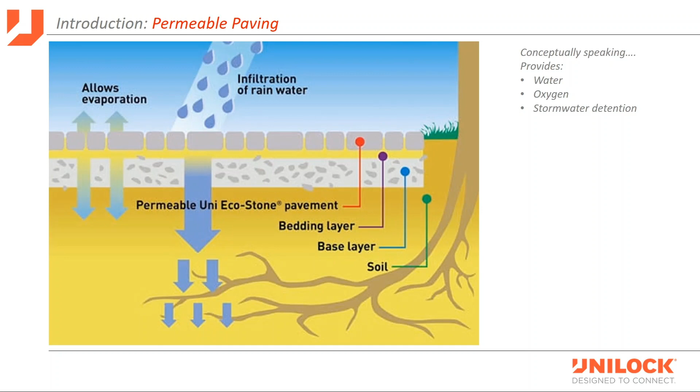However, people often forget that concrete pavers were designed for heavy-duty use. All over the world they're using these heavy-duty applications where forklifts and semis drive across concrete pavers. In the U.S., the Port of New Orleans, the Port of Tampa Bay, and the Port of New Jersey all have pavers in their container yards. The Port of Oakland is actually the largest paver yard in the U.S., at about 2 million square feet.

So when you combine the aesthetics of concrete pavers with heavy-duty capabilities, you create a new function with permeable pavement, by allowing water to flow through the openings in the joint and get back down into the subgrade soils.

These are pictures of Couch Place, one of the green alleys in Chicago, that links the theater district from the Goodman Theater to the Chicago Theater. This allows pedestrians to walk through this corridor safely without dodging puddles, as water flows through those openings, but also allows semis to pull in, unload and reload, as well as garbage pickup. So it makes it a multi-purpose alley.

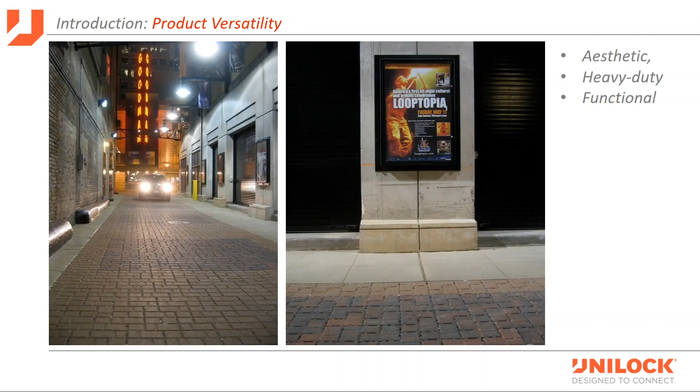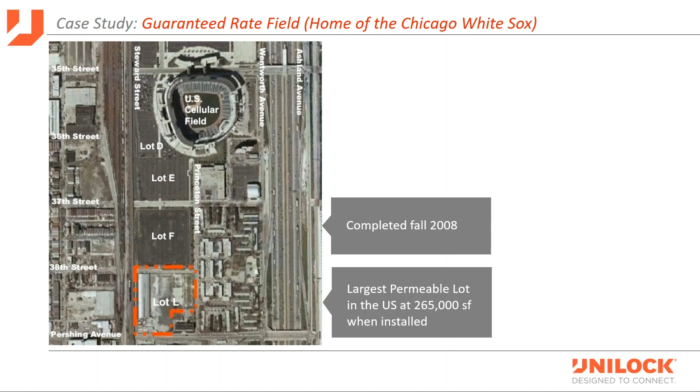So they looked at doing a traditional parking lot design, which included 44 inlets and catch basins, over 3,000 linear feet of reinforced concrete pipe. They also had to include a 73,000 cubic foot underground storage tank. And all this would have cost about $2 million in underground infrastructure that was going to be completely buried.

You never see that. So they went back to the drawing board to take a look at a green infrastructure project using permeable pavement. The first thing they checked out were what the site soils were going to look like. They discovered that because this used to be an old lake shore, they had a very high infiltration rate, up to 14 inches per hour, into the sandy subgrade soils.

That meant they could eliminate all the inlets. There's no reinforced concrete pipe or under drain, and they could eliminate the underground storage tank because they could use the granular base material underneath the parking lot as their storage area. So they ended up saving about 15% versus their traditional system.

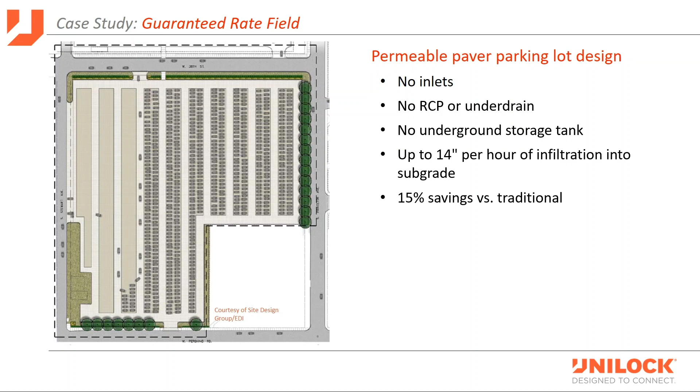The other great thing about this is that it does not connect to the City of Chicago stormwater system. The City of Chicago actually has a combined sanitary and stormwater system, so by dumping all this water into the stormwater system, it would cause problems in different locations.

Now we'll go back through the materials here in a little bit, but I just want to mention the capacity that's out there. This permeable lot was about 265,000 square feet. They had about 14 inches of granular base, and the void space generally is about 40%, which means you can generate about 123,000 cubic feet of storage. They only needed 73,000 cubic feet, so they actually have a surplus of about 50,000 cubic feet of storage on this project.

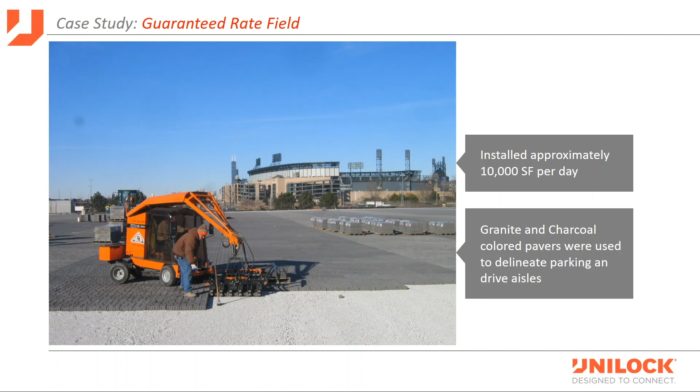Now they had 2 colors out there: a charcoal color and a granite color, and that was really to delineate the drive aisles from the parking aisles, or from the parking spaces. If you go out there on game day, they cram as many cars out here as they possibly can. They used a mechanical installation device, had a couple of them out there, so they're installing at least 10,000 square feet per day using the machine, and we'll talk more about that later as well.

The last case study I'm going to talk about is Buckingham Fountain. What makes this project unique is that it's a historic landmark located in downtown Chicago's Grant Park. The material that was out here was a decomposed granite / pea gravel type material in a pinkish color. This area was not accessible, so the Chicago Park District wanted to rip all this out and make this an accessible area for everyone to use.

When the project was completed in the spring of 2009, it was actually the largest permeable plaza in the U.S. at about 235,000 square feet. The biggest challenge was installing around this fountain area because that area is about 1 acre of space to navigate around. So the contractor started at 3 o'clock, worked clockwise around to about 11 o'clock, stopped, went back to the starting point, and worked counterclockwise so they could zip this up to become one giant monolithic segmental paving surface.

To meet the historic preservation's requirements, they needed to create that same look and feel as the existing pea gravel / decomposed granite material. So they selected the Unilock series exposed granite finish. We take crushed granite, embed it into the surface of the concrete, and then it's washed to create this sparkling surface. If you go back out there today, it actually looks better than the day it was installed because you have more granite that's exposed and sparkling out there.

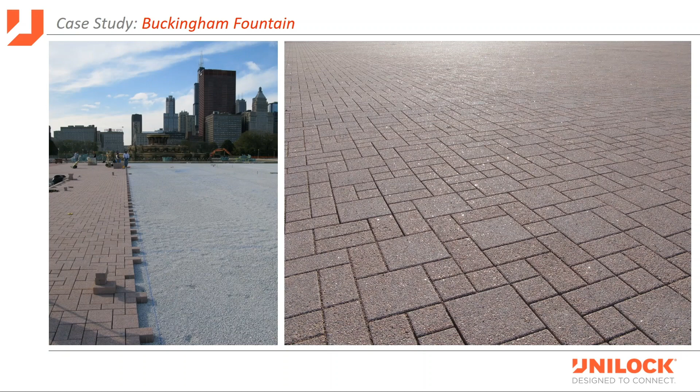And this is the view after completion in the spring of 2009, looking north towards downtown Chicago.

Part 3: Benefits and Systematic Solutions for using Permeable Interlocking Concrete Pavers.

I'll start off with some quick facts about permeable pavement. It is considered a structural BMP by the EPA's National Pollutant Discharge Elimination System, meaning that as the water flows through the granular base material, it's actually going to clean the water and improve the water quality.

Permeable pavement also can reduce runoff and runoff temperature. As I mentioned earlier, the aggregate base is often used for stormwater detention. If you're working with engineers on the project, they always want to know the C value, or runoff coefficient. It's actually 0, meaning all the water that hits the surface runs through the openings in the joint, goes through the granular material, and hopefully gets back down into the subgrade soils.

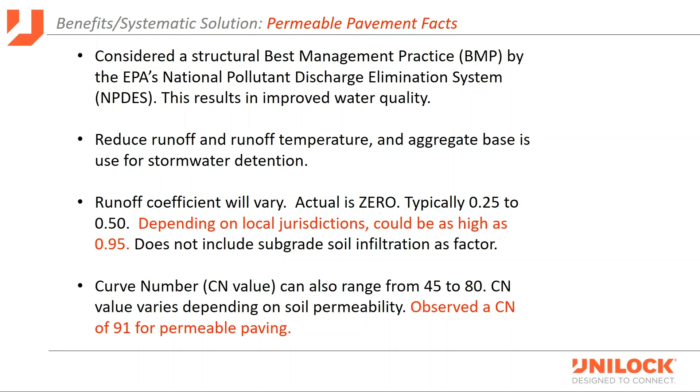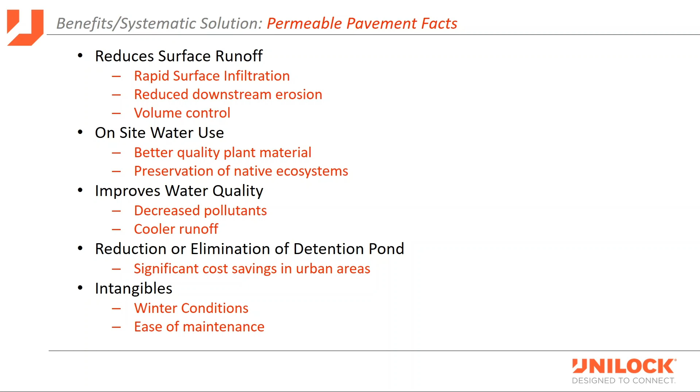Some additional facts, which we'll cover in the next few slides: it does reduce surface runoff, we'll talk about rapid infiltration, volume control, and how it allows you to use this water for on-site use, capturing it for plant material or preservation of native ecosystems such as wetlands. It also improves water quality, and we'll discuss how. You can reduce or eliminate detention ponds by using permeable pavement, looking at volume control and the total capability of the system. There are also some intangibles, like winter conditions and ease of maintenance.

The first benefit I want to talk about is rapid surface infiltration. In this video, you'll notice that we pour water on the surface. Initially it splatters in many directions, but it really only has to flow 2 or 3 inches before it gets into the joint material. It doesn't have to flow all the way across black asphalt, heating up and picking up contaminants. It just goes a little ways before getting back into the system. That's the initiation process, the start of the system capturing the water.

If we look at typical infiltration rates, for Eco-Optiloc we're looking at about 900 inches per hour, and with Eco-Priora we're about 600 inches per hour. Further into the presentation I'll talk about what that means and other permeable pavement options with their infiltration rates. When you get to the joint material, base, setting bed, and granular base, you might have similar infiltration rates, 500 inches per hour up to 1,000 or more.

We know that because we use ASTM C1781 to measure that infiltration rate. Basically, we put a ring down, pour water into that ring, and time it to see how long it flows through those openings in the joints.

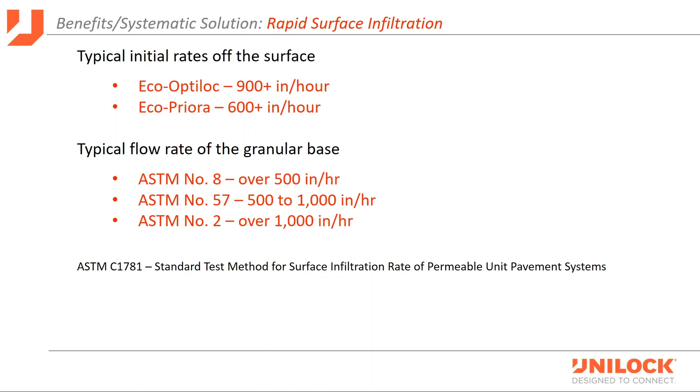Now, the second benefit I want to mention is volume control, or detention. This is a great example of how permeable pavement was used successfully. At Dominican University, when this was installed in 2003, they were starting to get more commuter students on campus and needed additional surface parking. When you put in surface parking with an impervious surface, you need adjacent detention.

With permeable pavement, you're basically stacking those on top of each other. At Dominican, they didn't want to encroach on their green space or athletic fields, and that's what made this project successful—they combined them, stacking them on top of each other. So all the water that hits the surface is detained in the base beneath it. This is a parking lot of about 375 stalls, about 3 acres of pavement, so that's a lot of water generated. This base capacity can actually hold a 100-year storm.

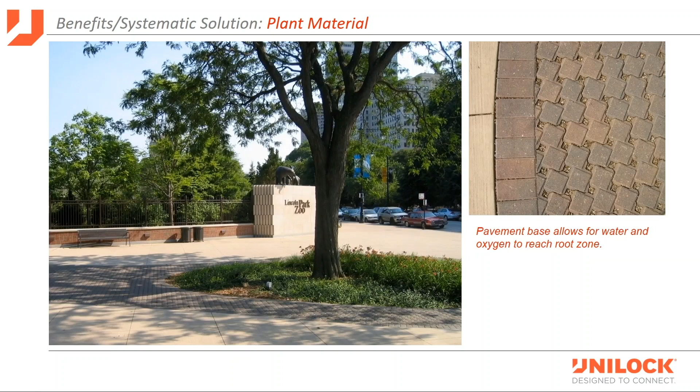The next benefit is plant material. You really do get some intangible benefits from using permeable pavement, because, as I mentioned earlier, you allow water and oxygen to get back down to the root zone. In this particular project, they had an existing tree, and with a new entry being built, they had to increase the walkable space to get emergency vehicles in and out. By using permeable pavement, it prevents the trees from being suffocated, still allowing them to get the water and oxygen they need, while still allowing for those heavy-duty vehicles.

This compares to your typical big box retail, where you might have impervious parking lot areas with little 5-foot square tree pits with trees planted in them. Eventually they get root bound, and really have no reason to grow out underneath that impervious surface, because there's no oxygen or water getting through the pavement. So eventually these trees will die in these spaces.

As I mentioned earlier, it does help decrease pollutants, so that's a great benefit of using permeable pavement. I usually give an example—it's kind of like a better water filter for the environment. As water flows through the granular material in the joints, base, and subbase, it captures a lot of those contaminants. When the water gets down to the discharge pipe or into the subgrade soils, there's a dramatic reduction in contaminants. We find that about 70 to 80, maybe even 90 percent of that material gets captured in the first 2 to 3 inches of those open joints.

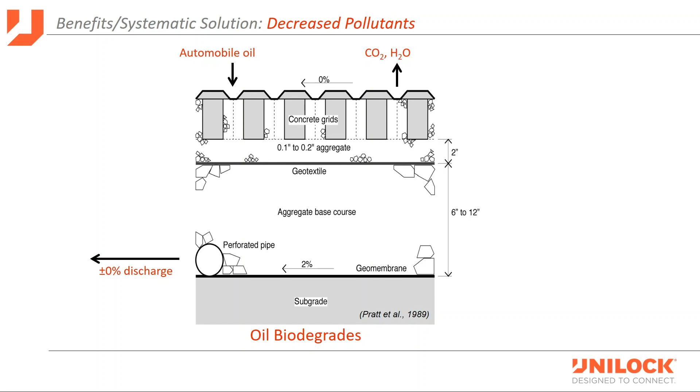Now, the one thing they find that does not get filtered is salt. So if you have de-icing chemicals like sodium chloride, that is not going to be captured in this system—it's going to flow through with the water.

The next great benefit I want to mention is volume control—we often call this detention. There are really two ways to manage stormwater: volume control, by slowing the water down and detaining it, or conveyance, meaning getting the water downstream away from your property as fast as possible. With permeable pavement, because it has rapid infiltration, water can flow through that area and then be stored in the base, as I mentioned a few times now. When you use permeable pavement, you can actually reduce that detention pond size, because your surface is pervious—you're allowing water to get through the joints into the base material, and hopefully getting some infiltration to the subgrade soils.

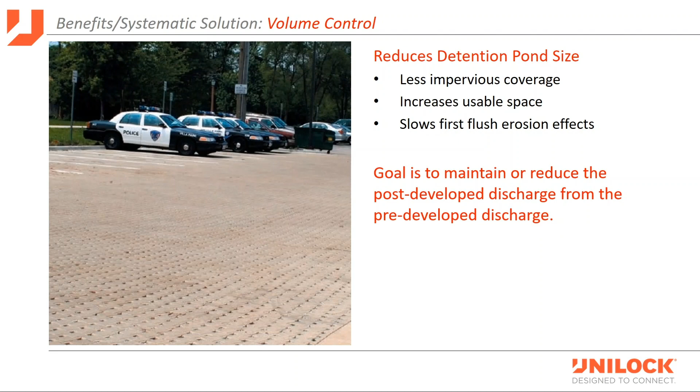So really, when you're doing site projects, the goal is to maintain or reduce the post-development discharge from the pre-development discharge, so you want those two to balance. If you're working on a completely green space or turf area where no work has been done before, you want to balance it so it doesn't change any of the watershed area around it.

For the next benefit, I'm going to go off on a bit of a tangent and talk about rainstorms. Specifically, I want to explain intensity and quantity and the effectiveness of permeable paver systems.

So we don't know. Intensity is controlled by infiltration — how hard the water comes down and hits the surface, and how fast it can drain through the openings in the joints. Quantity is detention, or sometimes called volume control — the total capacity that a permeable system can contain in its base.

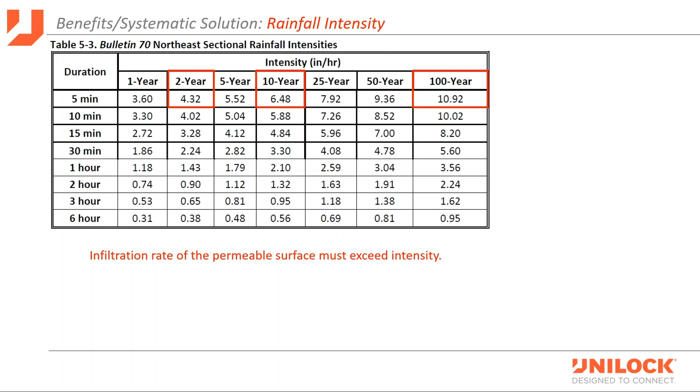But the most important thing to realize with intensity is that the infiltration rate of the permeable surface must exceed that intensity. Otherwise, water will start to drain off the surface into other areas. That's important to understand.

The way we measure that is using ASTM C1781, the standard test method for surface infiltration rate of permeable unit pavement systems. This gives you a test you administer using a single ring and some water — you pour it on the surface, time it, and measure it. In these photos, we've taken a 5-gallon bucket and cut the top off to create this ring.

We know the diameter of the ring, and we'll put some plumber's putty in there to clog it up so the water won't bleed out underneath this ring. We'll pre-wet this area, then take another 5-gallon bucket with 40 pounds of water in it, pour that into the ring, and time it. That gives us a duration for how fast that water drains through there, and we can calculate that. That's what this test method explains.

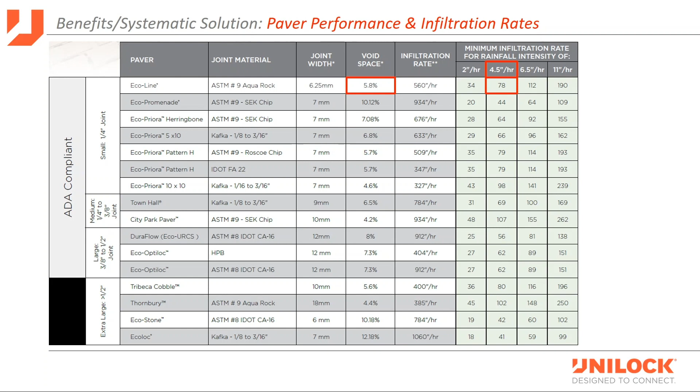The way we calculate these quantities is by taking the void space ratio of 5.8 and dividing it into the inches per hour. So basically 4.5 inches per hour divided by 0.058, or 5.8%, gives you 77.586 inches. We round up to 78 inches per hour. That's how we calculate that.

Now the reason it goes up in numbers for these other storms is because you have more rainfall for that event, so all the water has to drain off the surface of the paver through those joints, and you need to get that water off there faster. So that 78 inches represents about 13.8% of the maximum infiltration capacity. Of that 560 initial, it's dropped down to 78, which is 13.8% of the initial 560.

Now, if the infiltration rate dropped down to 50 inches per hour and you had a 2-year event of 4.5 inches per hour intensity, you're actually going to start to generate some runoff because the water cannot flow through those openings in the joint fast enough. So keep that in mind. Another way to look at it is that 78 inches per hour represents that the joints are 86.2% clogged. We'll talk more about that relationship when we get to maintenance, but I just wanted to point out how that works and how we calculate these numbers.

So it's a very important thing to realize because you do have a lot of bounce there, from 560 down to what a 2-year storm would be at 78 inches per hour.

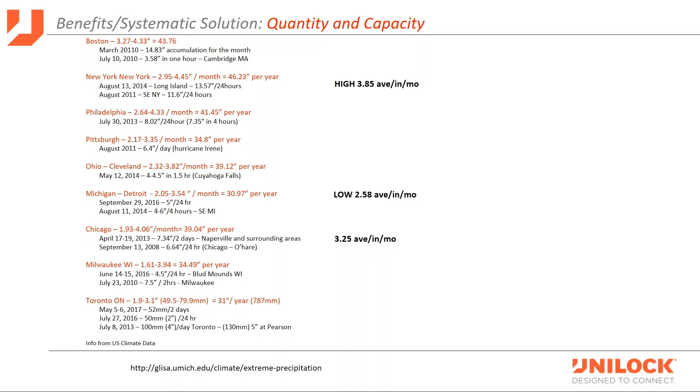So when we go back to the Illinois State Water Survey Bulletin 70, we're going to look at rainfall quantities. For stormwater calculations, they always look at the 24-hour amounts for the 2, 10, and 100 year events, so those are the most common that you see used. For a 2-year rainfall for 24 hours, the quantity would be 3.04 inches. For the 10, 4.5, and for the 100, about 7.5 inches of rainfall. Keep that in mind when you're comparing to your community what those rainfall events are.

Now, one often misinterpretation of these different events is that it only happens once every 2 years, or more commonly once every 100 years. You'll see people on TV say, oh, I've lived here my whole life and we've had 2 100-year rainfall events in the last 2 years, and you're only supposed to have one every 100 years. Well, that's not correct. It just means there's a 1 in 100 chance that you're going to have that size of rain hit your area.

To put these numbers in perspective, Hurricane Harvey, when it came through Houston in 2017, dropped over 50 inches of rainfall in 24 hours. That's an incredible amount of rain. In Illinois, a 24-hour 1,000-year event is only 10.5 inches of rain, so that 1,000-year event is a 0.1% chance of happening. So when you think about a 2-year storm, that's a 50% chance of rainfall. If you're seeing a storm come through on the radar towards your area, and they say it's going to be a 2-year event, that just means there's a 50% chance you're going to get that amount of water, 3.04 inches, in your area.

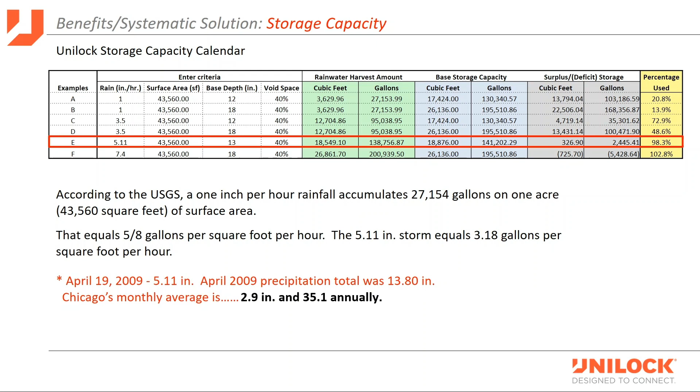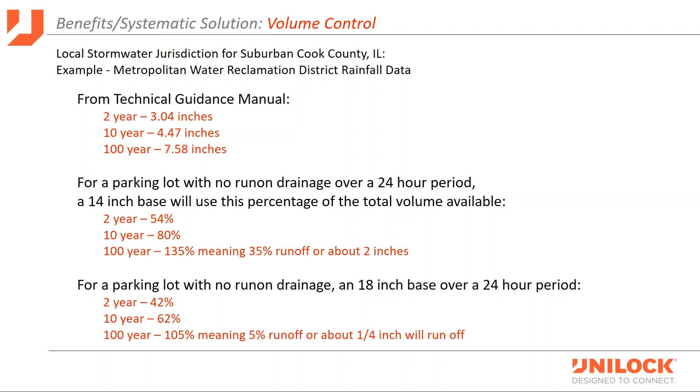When we look at historic rainfall data, the Center for Neighborhood Technology put together a year's worth of rainstorms and realized that 98% of the storms are 2 inches or less. Thinking back to those 2-year rainfall events, we're looking at 3 inches, so most of our rainfall events are not even a 2-year event. 98% are 2 inches or less, 95% are 1 inch or less, and the majority of storms through our area are a quarter inch, half inch, maybe three-quarter inch rainfall. They're not generating a ton of rainfall amount.

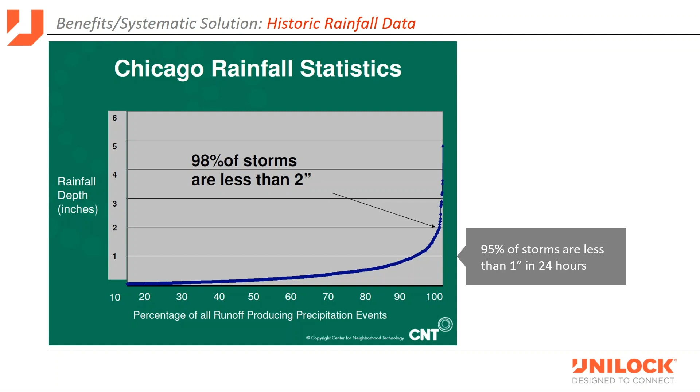Just in the Midwest alone, we've seen an increase of those larger storms by 37%. How is this happening? When you burn fossil fuels like natural gas and gasoline for automobiles, you release carbon dioxide into the air. The air expands, and when it expands it's able to hold more moisture. As that air floats along and hits a cold air mass, it drops that water, and you get those heavy, intense storms—rain bombs.

When the water comes down super heavy, it wants to run off those impervious surfaces and create flooding issues. By using permeable pavement, you can capture that water as it runs off the surface into the openings of the joints and back down to the base, slowing that water down to prevent localized flooding. Otherwise, you'll see more people on the news saying, 'I've lived in this area my entire life and I've never seen flooding like this before.' That's because of these rain bombs and these larger storms.

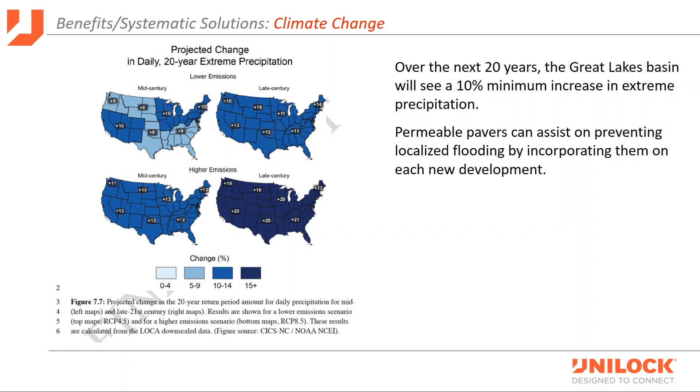All right, let's drill down on that rainfall case study for Cedar Rapids, the month of August 2009. Let's assume that the soil conditions out there are very poor soils, ranging from 1/10 of an inch to 1/2 inch per hour of infiltration. And we break down that storm by day, so we can start to look at the clusters of when those storms came through the area.

If we drop down to August 7th through the 10th, we see that they had 3.1 inches of rainfall for those 4 days. We know that the time of concentration for clay, loam, silty clay, loam soils would be about 34 hours, so it's going to take that long for that 3.1 inches of rainfall to drain into those subgrade soils. Before the next major round of storms came, they had 120 hours, so there's plenty of time for that water to be absorbed into those subgrade soils.

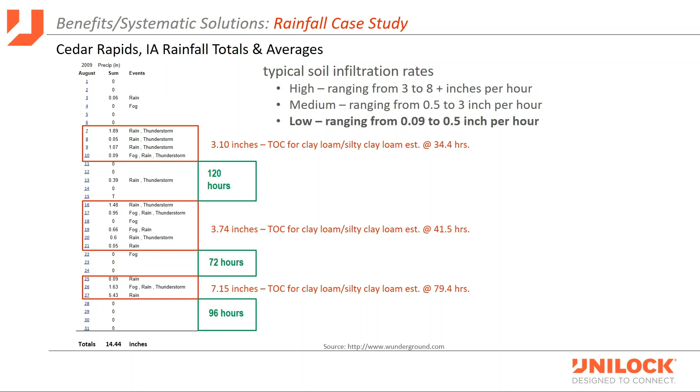Once the subgrade soils become saturated, though, it makes it harder for them to absorb any water. So think of it as a sponge. A dry sponge is going to absorb a lot of water initially, but once it's wet, it really can't absorb any more water. So you do have to have that water moving through the subgrade soils or off to another location through under drainage and things like that.

So just some reminders here. If you're working in a municipality that has established stormwater ordinance with permeable interlocking concrete pavers or any kind of green infrastructure, it makes it a lot easier to meet their requirements when it's in the stormwater ordinance. You can use those explicit requirements and allowances to design your system. Sometimes there'll be incentives for using green infrastructure like permeable pavement, rain barrels, rain gardens, green roofs, and things like that. Again, it makes it easier to design your project so you can get this permitted, and that's really the main thing. You need to get a permit for this stormwater.

There are some potential cost savings for using stormwater BMPs like permeable pavement, and that's because you can reduce that volume control or minimize the infrastructure going into that for that stormwater detention.

If you do not have any kind of ordinance with green infrastructure, traditional stormwater ordinance make it a little bit more difficult to get them to allow permeable pavement. And that's because there may be no credit given for stormwater detention, so they may still require you to have an underground storage tank or a surface detention. No incentives to use green infrastructure. When that's the case, it makes it harder to build that into your cost. It can make it difficult to actually design because it lacks guidelines and any kind of requirements for those systems. And then you can't calculate it if they don't have those requirements. So that's the biggest challenge.

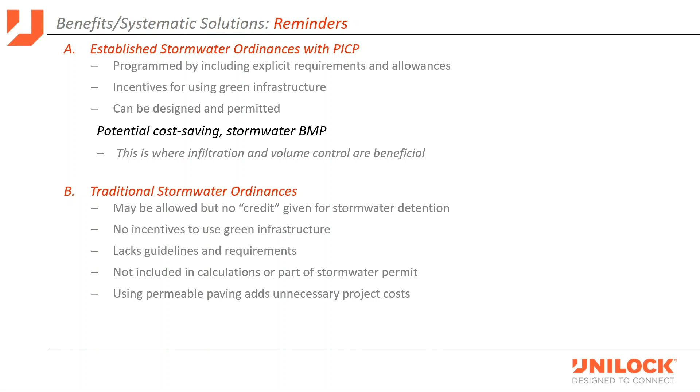All right, we'll switch gears back to a new benefit, and that's winter performance.

Here we have a project called Maxwell Street Market, on the south side of Chicago, where the Illinois EPA put probes in the soil to measure temperature during the winter and look at rainfall quantities. On January 16th, 2009, the air temperature was -7 degrees Fahrenheit, but all the probes in the soil were still above freezing, ranging from 33 to 38 degrees Fahrenheit. This means if it snowed 3 or 4 inches that day, and the next day it got above freezing and melted, draining into the base and subgrade soils, they would still be able to absorb that moisture.

Even when the ground is frozen, water can still drain in there. In this case, it still wasn't frozen, so it wasn't as much of an issue. What we've seen in other similar case studies is it takes longer for the subgrade soils to freeze once air temperature drops below freezing, and they warm up quicker, because it's insulated and there's some breathing action from air flowing through. So that base temperature remains above freezing much longer.

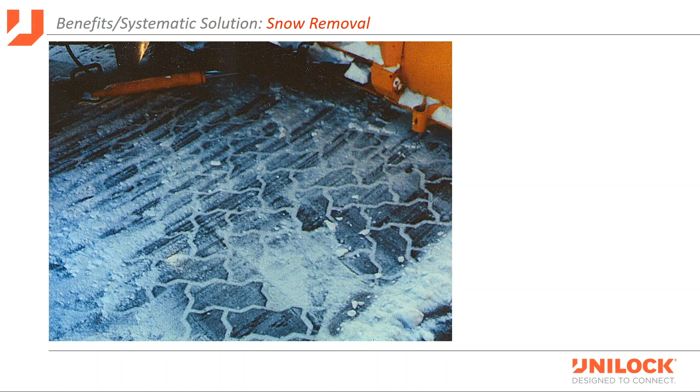Another benefit is you can still snowplow permeable pavers just like non-permeable pavers or other impervious surfaces like asphalt and concrete. We suggest using a rubber tip on the plow to prevent scraping or rust marks, and I'll show an example here. Here's a permeable paver system that was installed, and you can see where they pushed the snow from the right side over to the left and packed it against that parking island, with the curl of the snowplow visible. Essentially, it got up most of the snow off that surface.

If they put down some de-icing chemicals, it's going to melt and drain through those openings in the pavement. Keep in mind, if you use a steel tip on the plow, it's going to scrape off some of the steel onto the pavers and leave rust marks as it oxidizes. That's not damage to the paver itself, it's just the rust left behind from the steel on the plow.

Now you can see, towards the center of the screen, there's a triangular area where a paver was tipped up just a little bit and the snowplow was grinding that surface off, but it didn't split it or rip out the paver. It still stayed in place and intact, but you do see some grinding action. That's one of the reasons we suggest using a rubber tip plow.

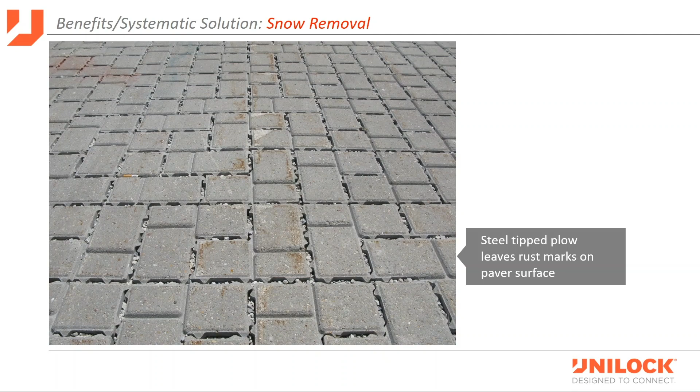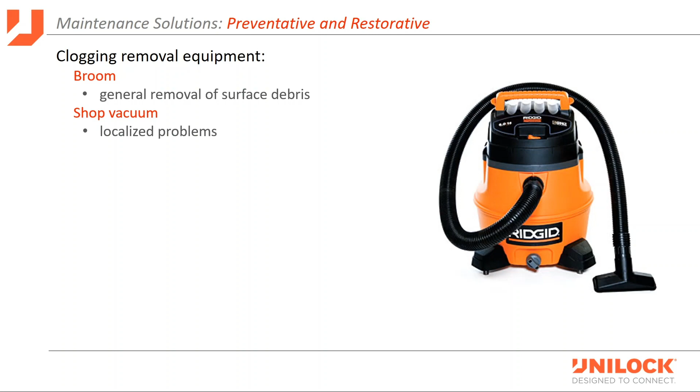Now I want to talk about preventative maintenance and restorative maintenance and what equipment is used for these applications. Keep in mind you don't have to have high-tech equipment to maintain your system. First, you could just use a broom. If someone spills mulch or grass clippings on the surface, you can brush those off fairly easily, getting them out of the joints so they don't pack down in there. Shop vacs also work—if someone drops potting soil into those joints, go vacuum it up before it packs in and dries, preventing infiltration.

You can also use backpack leaf blowers. A lot of landscape companies doing maintenance already have these, so they should always be blowing off the surface of the permeable pavement. They can do large plaza areas or sidewalks very easily with this to get any grass clippings or pruning debris from shrubs off the surface of the pavement.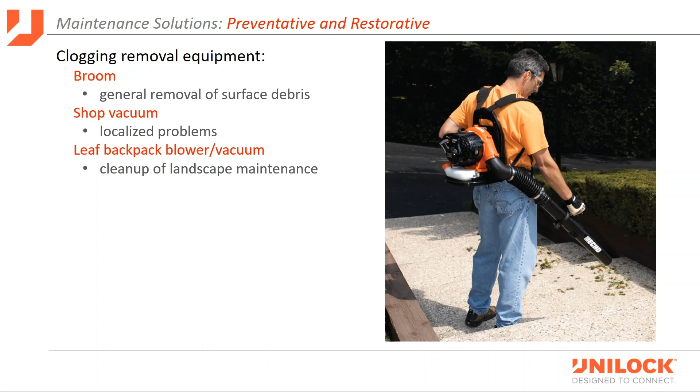Rotary brush sweepers work great. Not only do they work well getting debris out of the joints, but they also work very well in the wintertime. For example, on a college campus that needs to maintain sidewalks for safety, these work well because when you get less than an inch of snowfall, it often gets packed down from foot traffic. The rotary brush helps break up that packed-down snow and get it off the surface. So these can clean the joints and also be good for snow maintenance in winter. Just make sure you use a poly brush and not a steel brush on the rotating bristles.

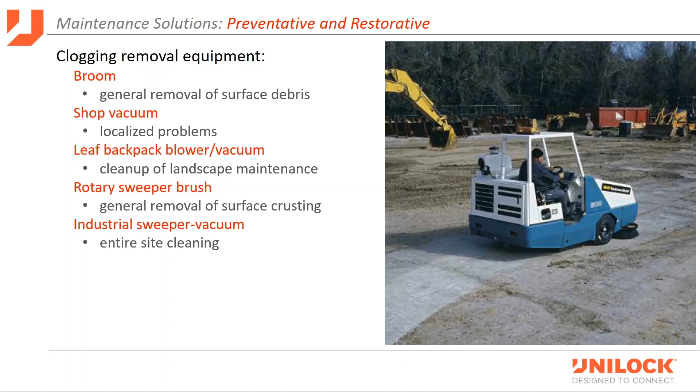There are also some industrial street vacuums or sweeper vacuums out there that help suck up any debris on the surface. Those work well to remove loose material, and they should be used on a regular basis, at least a couple times a year, to clean the surface.

You can power wash and blow out the joints with pressure washing. That does help clean it very quickly. And then the worst case scenario is you can remove and reinstall the pavement. So if you had a development site going on with truck traffic going in and out with supplies packed in dirt, you can pull that area up, clean the stone setting bed, replace it and zip it back up, and no one would ever know the pavers had been removed. That's another great example.

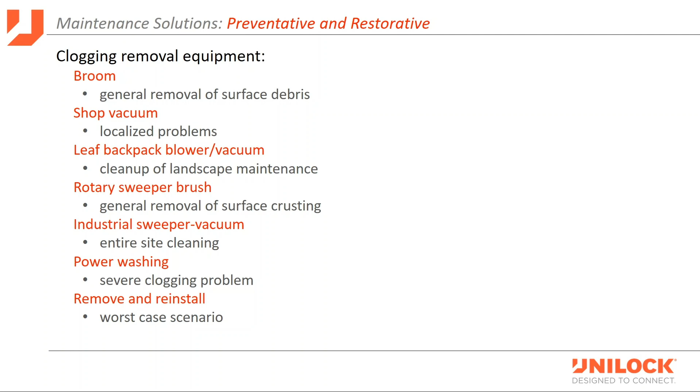Now I consider most of that equipment more in the preventative category. Let's talk a little bit about the restorative side.

This is a street vacuum that has a rotary brush that spins around and flips any loose debris out in front of the vacuum plate, and that vacuum plate sucks up all that loose material. Generally it pulls out between 1 inch and 3 inches of material depending on the amount of suction and how much clogging is occurring, but it should restore the infiltration rate back significantly higher than what it was prior to this vacuuming.

Now this I would only do maybe once every 10 years, as long as you're doing the preventative beforehand. This is really kind of a worst case scenario to come out here and do the restorative. You want to avoid having to do restorative maintenance.

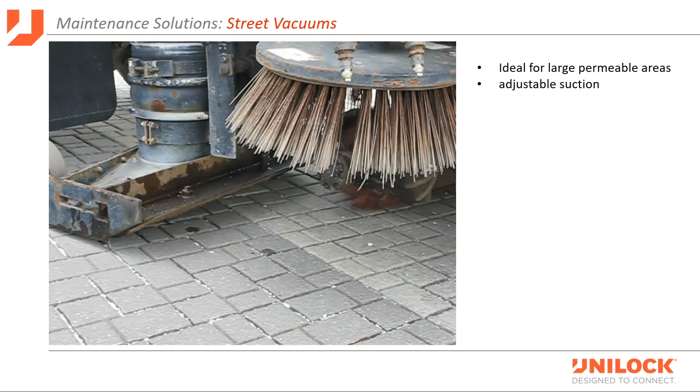Now here's a new piece of equipment. This is a vortex cyclone machine, and it has a deck similar to a lawnmower, except the blades are vertical, and these rotate around at very high speed along with a power washing device underneath there. So it will spray the surface and then vacuum it up at the same time. Very effective in cleaning the surface.

As a matter of fact, the Interlocking Concrete Pavement Institute did a little test, and they used the same infiltration test that we do, the ASTM C1781, to check the infiltration rates prior to using this piece of equipment. They found that the porous concrete, the porous asphalt, and the permeable interlocking concrete pavers all had very low infiltration rates: 20 inches or less for the concrete and pavers, and 42 inches for the porous asphalt.

But after they took the cyclone machine and went across with one pass on the permeable pavers, they restored the infiltration rate from less than 20 inches per hour up to over 327 inches per hour after one pass. They actually did not need to go back and do a second pass. Whereas the porous concrete went from less than 20 inches to, after two passes, 80 inches per hour. So yeah, they had a significant increase in their own infiltration, but the permeable pavers are still 4 times more infiltration per hour than the porous asphalt and the porous concrete.

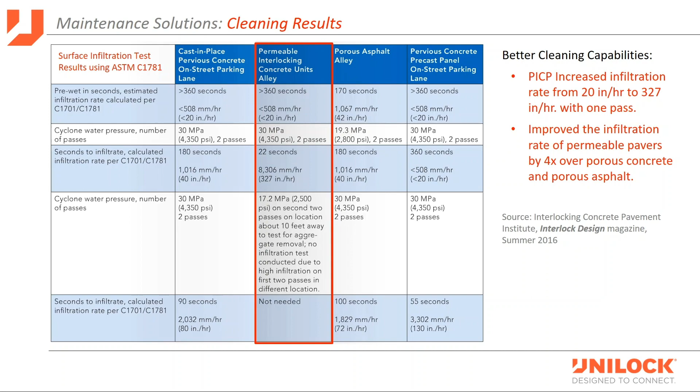PaveTech has come out with their own as well. These are walk-behind devices, one that power washes and one that does the suction device. So these are hooked up to a truck that has the equipment, and you just walk behind. It's going to take a little bit longer to do large areas with this, but great for plazas and sidewalks.

Back to the surface infiltration rate with maintenance, we've created this little chart here that explains that relationship. So if you look at the left side, it shows you inches per hour from 0 to 700, and then across the bottom is years, going from 0 to basically 30 years.

In this theoretical example, the blue dotted line that goes from 700 down to 15 years would be if you did basically no maintenance. So we're assuming that there's going to be a drop in performance of that surface infiltration rate. We're just using this as an example.

Now, what else is going on here is if you do your minimal preventative maintenance, where you go out there and sweep a couple times a year and pick up any loose debris, you might extend that out a few years. So the dash dot dash line in purple goes down, and it goes out to about 20 years or so. Across the bottom we have the 2, 10, and 100-year infiltration rate. So if you think back to the intensity I was talking about, the 4.5, the 6.5, and the 11 inches per hour intensity, those are kind of like your lines of factors of safety to think about when you need to do your maintenance.

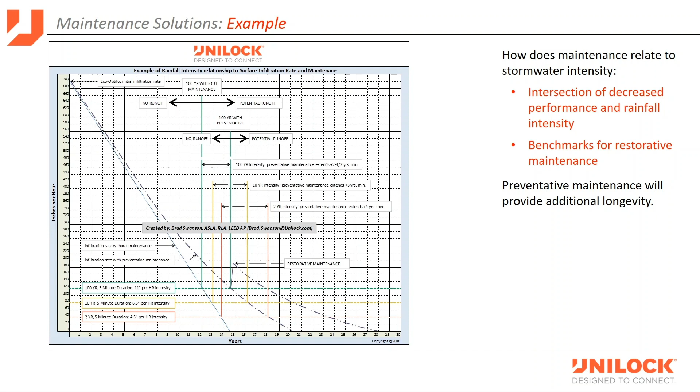Part 4, design considerations.

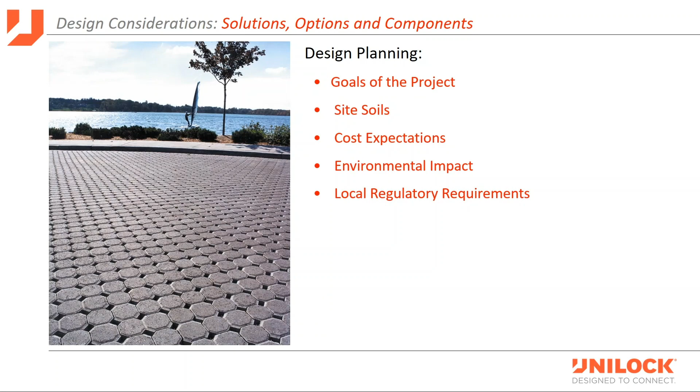Keep that in mind, and you don't want to use this on hot spots, like for junkyards and things like that, where you might have chemicals going back into the ground. And then each jurisdiction or your local regulatory requirements are going to be different for your area, so you always got to look at the municipal stormwater ordinance to see what they're going to allow and not allow.

Now conceptually, there's 3 ways to design the system. The first way would be if you have very poor soil, like that heavy clay soil where you get 1/10 of an inch per hour of infiltration or less. You're going to want to have some sort of under drain pipe, a perforated pipe, to capture that water and drain it out of the base. This could go to a storm catch basin or through a manhole, connecting to your municipal system. But essentially you want this to be able to drain, because most of it's not going to be able to do that in those poor soils.

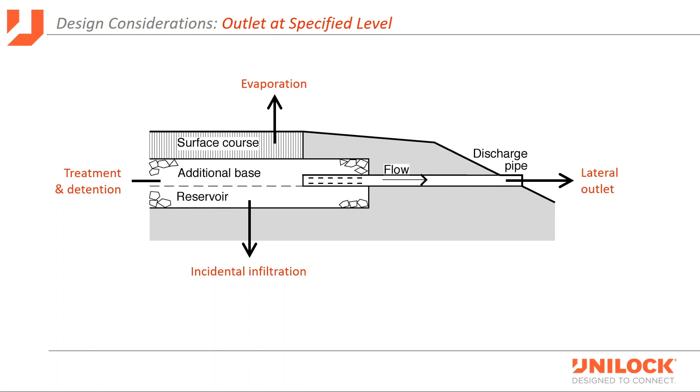The second way would be if you have fairly good soils, around 1/2 inch an hour or more - that's our rule of thumb. You can raise that under drain pipe up so you can capture that first 1/2 inch of rainfall and let that allow infiltration back into the subgrade soils. Then if you get the really big storms, this could outlet to some sort of municipal system through a manhole, and that manhole might have a restrictor plate in it to slow that water down and back it up into the stormwater base and use that as your detention.

And then the third way is like a couple of the case studies I mentioned earlier, where they have high infiltration rates into a sandy soil. You potentially could eliminate all the underground infrastructure and let all the water just drain naturally back into the subgrade soils.

Besides the infiltration rate, you've got to look at the structural capacity of your system. When you drive on these things with wet, saturated soils, you can't have deflection at the surface. So the thicker you make that base, the more it spreads out in a cone-shaped fashion—think of it like a snowshoe on top of snow. It creates a stable base for those pavers the further depth you have.

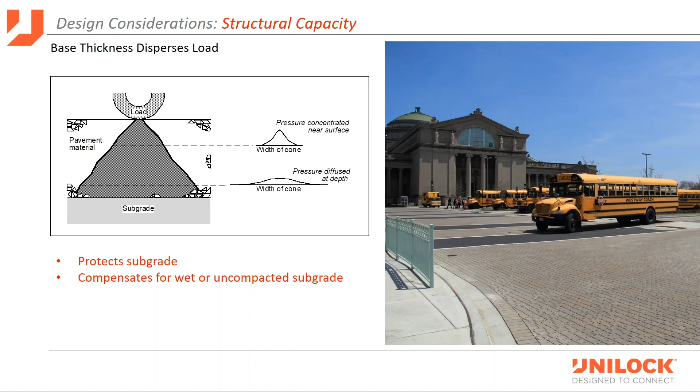So we did notice when we measured the infiltration right here a few years ago, it had dropped down to about 45 inches per hour, down from the initial 1,000. So it's definitely a candidate that needs some restorative maintenance.

Now in terms of the granular base and sub-base, all the material is crushed angular stone. You want these to lock together—there's no fines in the base or sub-base. Typically they'll have about 40% porosity or void space in those stones, and again, you'll see infiltration rates of 500 inches per hour or more. Generally these are pretty single size in their stone size.

Now our rule of thumb is that about 3 inches of base will store about 1 inch of water, and we say 24 hours—you really want that to drain out. With the California bearing ratio, you have up to about 72 hours before your soils start to become compromised, but I would try to limit that to 24 to 48 hours. You really want it to drain.

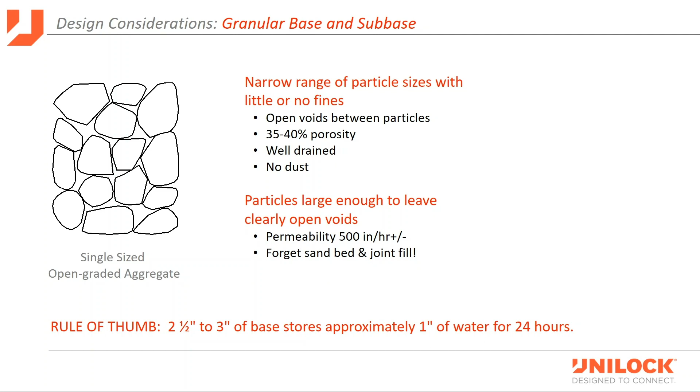For the base reservoir area, you're looking at ASTM number 57, which is about a 3/4 to 1 inch size stone. Again, crushed angular, and it's going to have that 500 plus inch per hour infiltration rate.

And then the sub-base, you may or may not need—it just depends on the soil type. That's going to be ASTM number 2, so it's a larger 3-inch stone. The number 57 will actually choke out into the number 2 stone, so you do not need any geotextile between these layers. The number 2 will add some structural thickness over the subgrade, so you may or may not need a geotextile under that between the subgrade and the sub-base—it depends on the soil type. Typically, if you have a clay soil, you'll want some sort of geotextile underneath there. But these stones allow for very rapid infiltration through the system and also good detention.

Now, the setting bed and joint material may or may not be the same material, but typically the setting bed is an ASTM number 8, so it's a 1/4 to 3/8 inch chip. Again, high infiltration rate, 1,000 inches per hour. What makes this nice is it's small enough that you can screed it like a sand material and get a nice level setting bed for those pavers to set on.

So in this photo, you can see the number 57 in the foreground and then the number 8 smaller stones setting on top of that. Again, there's no geotextile between these layers—they'll separate when you spread these out, and so that works very well.

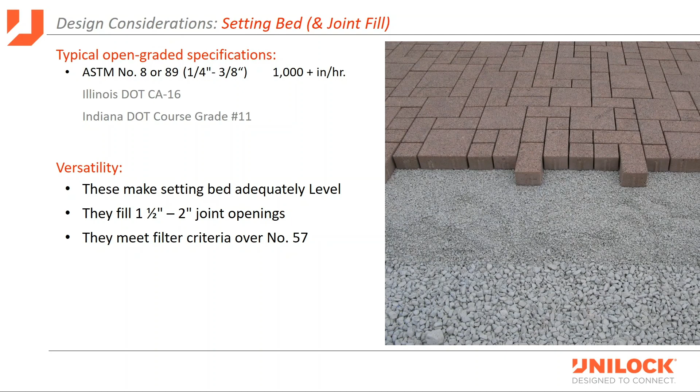Regardless of whether you use porous concrete, porous asphalt, or permeable pavers, they use the same base and sub-base materials. The pavers are going to use that ASTM number 8 setting bed though.

When we talk about the joint material, depending on the joint size, you may or may not be able to use that ASTM number 8. In Illinois, we use the CA-16, but generally speaking, the ASTM is a number 9 stone for anything 1/4 inch in size. Once you get up to around 1/2 inch, you can start using the ASTM number 8 size stone, which is a little bit larger. The number 9 stone is a little smaller, so it sweeps into the joints easier for equal pressure and still allows for good rapid infiltration.

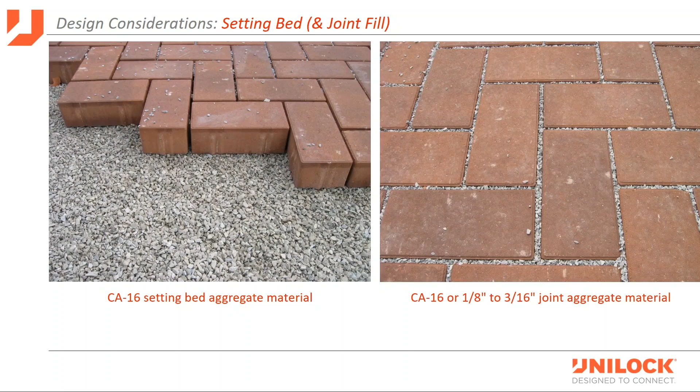Now, some products don't use a joint material, which we think is incorrect because the joint material has a purpose. Not only does it filter and keep debris at the surface so you can easily sweep it off, but it also locks up the pavers and prevents them from moving around. If you remove that joint material, you're going to start to see things shift and move out of place. So it's not ideal to remove that.

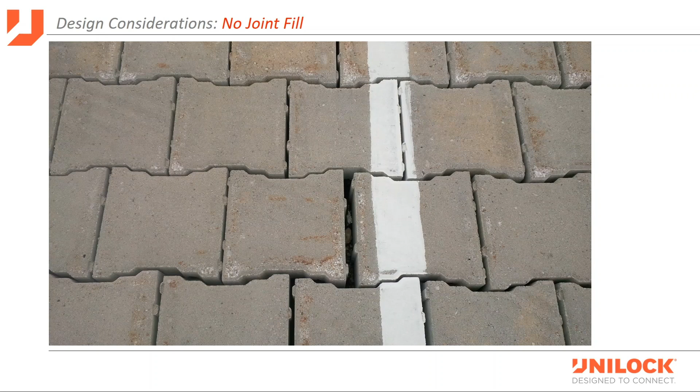In this case, you can see this paver here is widened out more than a half inch, which we would consider not accessible. It could also capture a bike tire if you're not careful, or a roller blade, so it's something to be concerned about. You notice in this photo it's just capturing a lot more debris, and once that gets down in there, it's much harder to get out of those joints. So that's a critical thing to consider, using a paver that can accept joint material to give lockup and also help keep contaminants from getting into that base material.

Okay, I've saved the best design consideration for last, and that's the permeable pavers themselves. If you're looking for spec sections, MasterFormat would be in Division 32, Section 1413 for the non-permeable interlocking concrete pavers, and the .19 would be for the permeable interlocking concrete pavers. The only difference between these sections is the materials that go in it: the base material, subbase, and setting bed. With the permeable, as I've gone over, it's all open graded material, whereas the non-permeable pavers might have a dense graded base and a sand setting bed depending on your project.

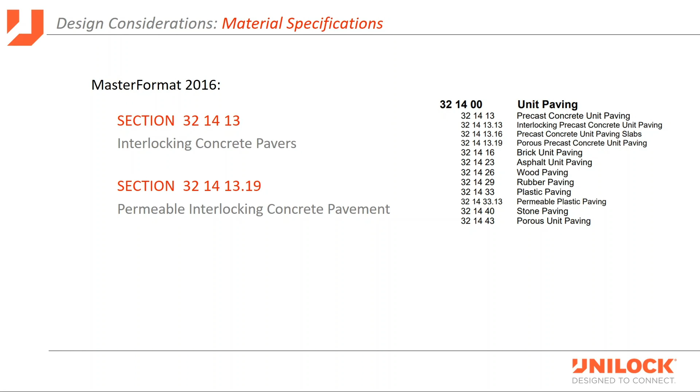There are lots of different spec sections out there, so make sure you're using 32 14 13 for concrete pavers. Some other products use different sections and they could be confused. It's better to have different sections for these different paver systems because there might be subtle differences in how they're installed. But within the concrete pavers section, we manufacture all these pavers to ASTM C936, the standard specification for solid concrete interlocking paving units. Any paving unit smaller than 101 square inches follows this section; anything larger will use a different manufacturing ASTM standard.

For this, we're going to look at three additional tests: ASTM C140, ASTM C1645, and ASTM C418 for abrasion durability. The C140, absorption and compressive strength, is really the nuts and bolts that you can compare to other products. The freeze-thaw durability is specific to concrete pavers, measuring how well they hold up to freeze-thaw. They put the paver in a tank of 3% saline solution and freeze it for 50 cycles, and it can't have a certain amount of deterioration or breakage off that product. But let's look at the C140 specifically.

The quality control for C140 requires a minimum PSI of 7,200 per unit with a maximum absorption of 7%, and you need to have an average of about 5% absorption.

We actually have a higher internal standard at Unilock. Our minimum PSI is 8,500 with about a 4% average absorption and a 5% max. We also have really good dimensional accuracy, plus or minus 3/64 of an inch, so very, very tight tolerance for the length and width on the pavers.

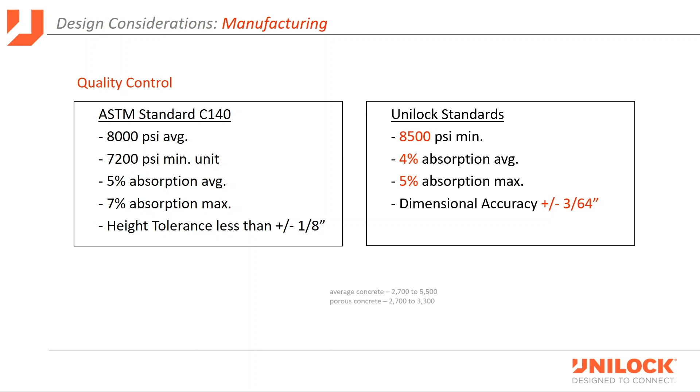Now the average poured-in-place concrete might have a PSI, after 28-day breaks, of anywhere from 2,700 to 5,500 PSI. Porous concrete is going to be even less, since you're leaning the mix out with less concrete and less aggregate. It could be as low as 2,700 to 3,300 PSI on average. So it just depends on how that's made and what it's for.

We send everything out for third-party independent test results, and this is an example here showing you for the Eco-Optiloc material manufactured in 2018 that the compressive strength was an average of 11,000, which is a really good number compared to our minimum of 8,500, with an average absorption of about 4.5%.

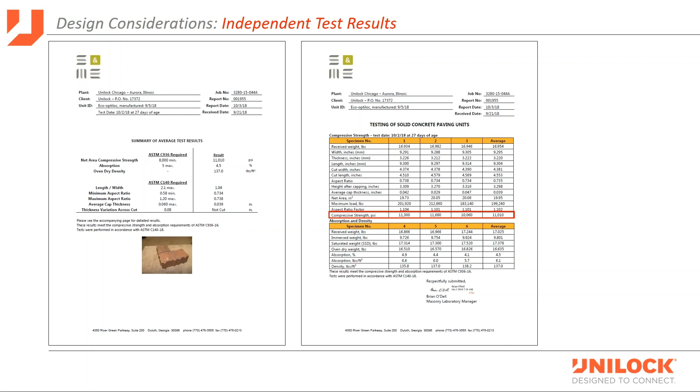Now I see a lot of our test results closer to 12,000 or 13,000 in some cases. I've seen them as high as 18,000 for some of our wet cast material, and absorption I've seen down in the high 2% range, 2.9, 3%, for some of the low end. That's important because the less absorption you have, the less expansion and contraction you're going to have with that product, and it's going to be much more durable.

All right, let's take a look at the aesthetics of these pavers now. This is the best part here. As you noticed before in the chart when we were talking about the infiltration rate, we had a whole list there. Let's look at the visual of these now and show you the differences between them.

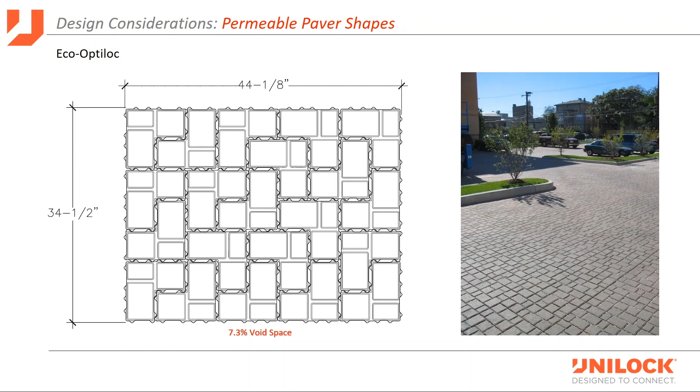The first one here is Eco-Optiloc, shown in the configuration the way it would be mechanically installed. This is what we call an L-shaped paver, and it's made to really resist the forces of cars turning and braking, so it's ideal for large parking lots. The void space is about 7.3%, and the joint width is right around 12 millimeters, or just under a half inch. When you see it laid out in a parking lot area, it looks very much like a cobble surface, but when you get up close you can see there's actually joint material in there and the L shape of the paver.

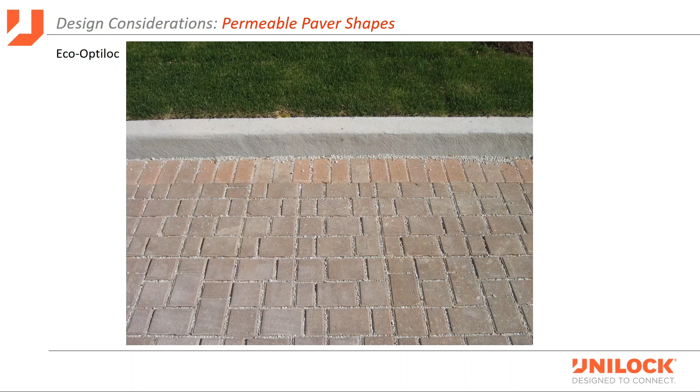As I mentioned, this is an L shape, and this illustration really shows it well, how it resists that turning and twisting motion based on that L-shape paver. It was used out at the Museum of Science and Industry, which I talked about earlier in my case studies. It's also been used at several college campuses for large parking lot areas, and is a great paver for mechanical installation.

The second one here is Eco-Priora, and this one is also able to be mechanically installed in this configuration. This has about a 7% void space. The joint width is only about 7 millimeters, or a quarter inch, and the photo on the right shows where it's actually picked up mechanically installed.

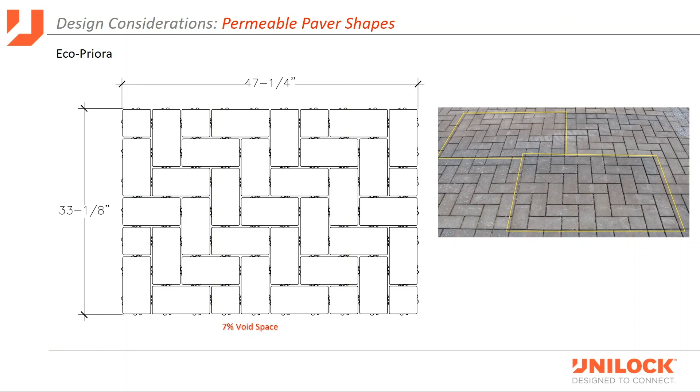Now this is if you don't take out the 5x5 half-stone pavers. You can stitch this together mechanically so it doesn't have any of the 5x5s, but then you're scrapping that material and throwing it out, so it would add a bit of cost to do that. So most owners elect to keep those in and just do the similar representation of the herringbone.

Now this is if you'd install it by hand. You can see here this is a project where they used a brush finish on the surface, and the light really reflects off that—pretty cool. You can see that grain in the paver surface, and then they painted on some parking stall stripes for this. It's also been used in a lot of parks and college campuses.

This is a park here in Chicago called Mary Bartelme. You may have seen this in some of our ads in Landscape Architecture magazine. This has, again, a brush finish and then a smooth Premier finish on the surface. Here's another example of a brush finish surface at another park area.

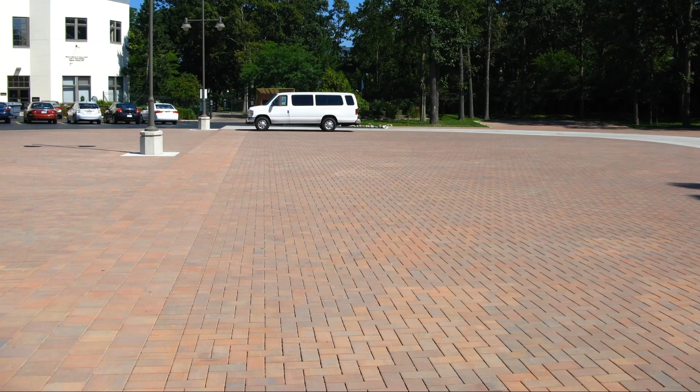And then it's been used in large parking lots. In this case, they had a Premier finish in a color called Autumn Red, which is a blended color. You can see they elected to hand install this area and create a true herringbone pattern, but you can see that difference in color.

Now this is a fairly new product. What makes this unique is that it's a 4-inch thick plank paver, so it has a continuing running bond type pattern. This comes in a true rectangle, and then you have to offset it mechanically to get that 3.5 or 3 3/4 inch offset, which creates bond lines that aren't completely straight. It's been used in plaza areas, but also in large parking lots.

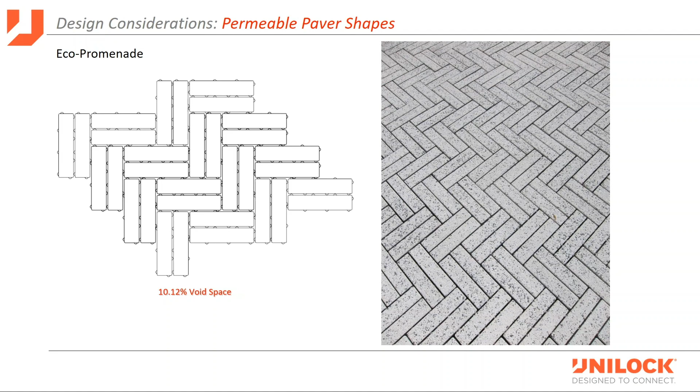A new paver we came out with back in 2014 was this Eco Promenade. It's a 3x12 permeable shape, designed for the Navy Pier project, which you can find video and a description of on our website. It's been used in the pier area in the park, as well as many other projects around Chicagoland and out on the East Coast.

It's performed very well. It has a very high void space ratio, over 10%, so you get really good infiltration off the surface. And because it's 4-inch, you can actually drive semis across this space.

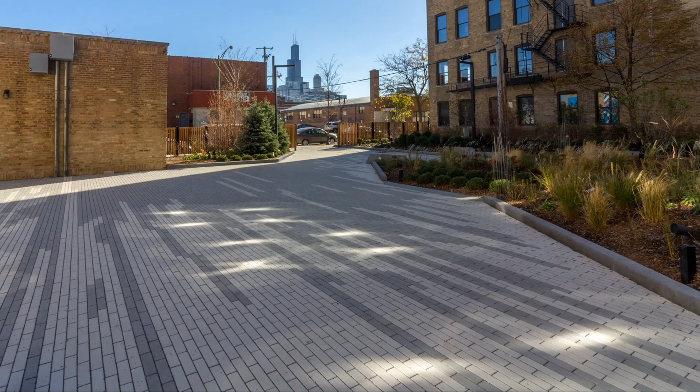Here's a project where they have it in a turnaround drop-off area. This is in a color called Steel Gray, which is a Premier finish. Also used in pocket parks, here with a couple different colors to create some visual interest. And once again, you can see the Sears Tower back there, Willis Tower photobombing my pictures.

Now this is a truly unique product out there called Town Hall. This is a wet cast material, so it's made a little bit differently, but you're not compromising on structural integrity of the product because it still has very high PSI and very low absorption rates.

If you use this in a running bond or herringbone pattern, it has about a 6.5% void space ratio, and it has a little bit wider footprint, so you can see the void spaces in that lane pattern. But a great product. Here's a project where they used it for a college, on a college campus, as a north-south spine through their campus.

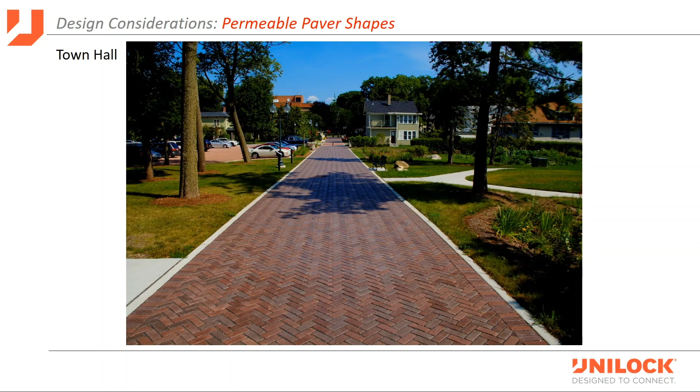Here's a product called Eco-City Park, a hexagon shape, 6-sided, with about a 1 centimeter or 10 millimeter joint. It has a low void space ratio of 4.2%, but it still has a very high infiltration rate because of the wider joint size, so you get good water flow through there.

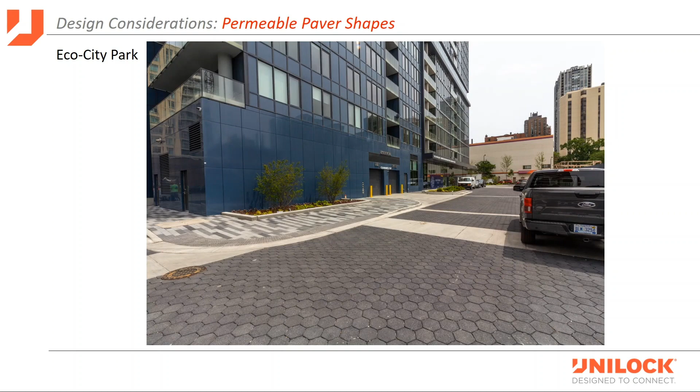This product is actually really good for drive areas because it does lock up. It's also unique because it can lay in 6 different directions, so you can create patterns going different directions very easily with this product.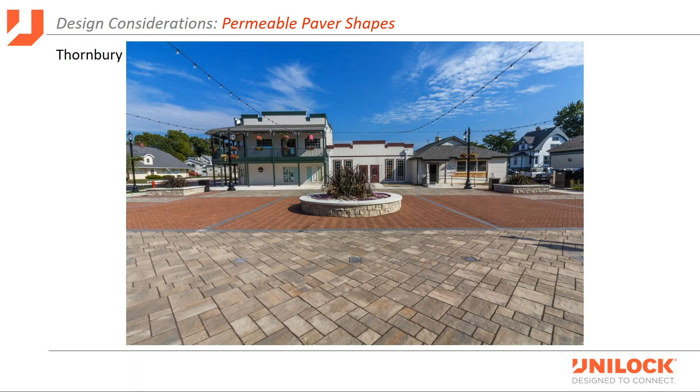You could still drive light duty vehicles across this. It's only 7 centimeters thick, about 2 3/4 inches, but certainly a nice product for plaza areas. The reddish brown paver in the center there, that is the Eco Priora as well.

Which leads me into my next area of design considerations, and that is surface material. Not all permeable pavers are apples to apples in terms of their aesthetics. There are different finish options available for most of our pavers, whether it's mottled, exposed granite, smooth, brushed, or textured. They're all available on most of our products for your permeable pavers, and we actually have some products that we can do factory coatings on to make them stain resistant, so keep that in mind when you have a project where you want to use something like that.

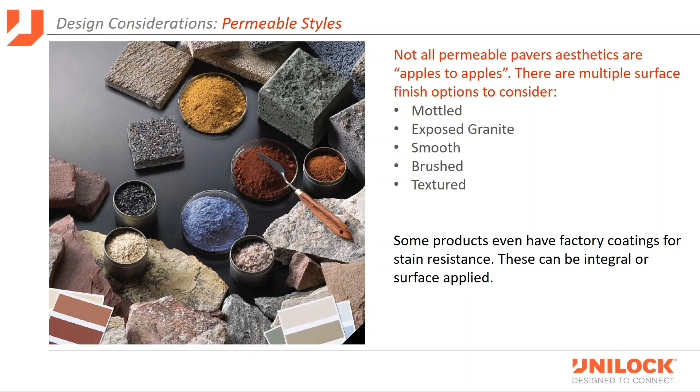Now, with a lot of those different finish options, we make what we call a face mix paver. Our brand is Enduracolor, and what this is, it's a 2-step process that has a larger aggregate size in the base and then much finer material on the surface.

It's all done on the wet side and compacted so it never delaminates or pops off. It's going to cure together and be a very strong product. By having the face mix, you get a much better wearing course on the surface, so it's not going to fade over time, and you get the benefits of the larger stone on the base for strength.

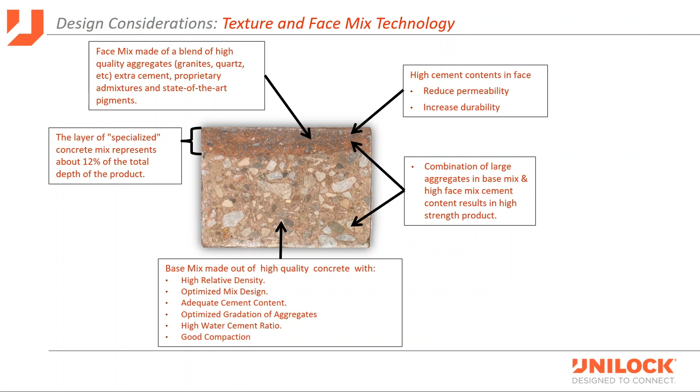So in this case we have a brush finish, and that's a good example to show you visually what it looks like and see the way the sunlight really helps pop out those brush marks. But there are several different options out there.

Now the only flagstone we have currently is the Thornbury, which I just mentioned. And then we have a couple new ones out there that we haven't really done in permeable pavers yet, and that's Granito and Revila, which is a shot blasted finish.

And then you also have the option for your classic through mix finish. We do make that, and we use a lot of that for the permeable parking lots that are larger in size to cut down on cost.

But you can see in even that photo there's a little bit of the aggregate showing up at the surface, and so when those weather, you start to see the color wear off those aggregates, exposing them underneath the surface, which gives the appearance of fading. So when you use darker colors like charcoals and reds, you tend to see that aggregate show up more than if you use lighter colors like buffs and grays.

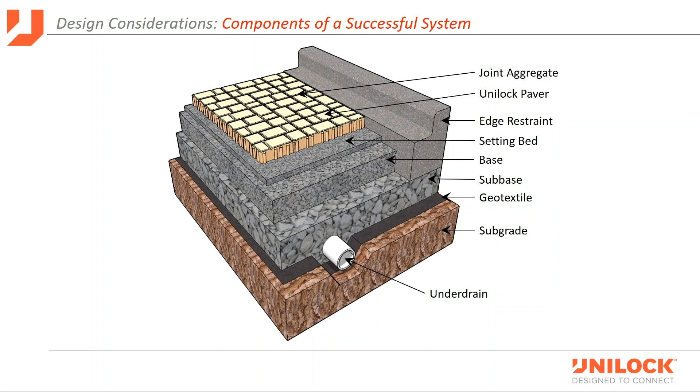So those are all the design considerations in a successful permeable system. You have the pavers on top, your granular base materials. You may or may not need your underdrain and geotextile, and then you always need to have some sort of edge restraint with a permeable pavement system, or even non-permeable pavement systems. You always need to contain those pavers.

If you're looking for a typical cross section, you might see this being a very typical type section. You'll have your different stone materials layered up. You do not need the geotextile between those stone layers, only between the subgrade soils. If they're sandy or clay soils, you may not need that geotextile. Work with your engineer on that as well.

And then the thickness will vary based on your project. Again, you may not need that sub-base material. You can use all the base material, the ASTM number 57, for your permeable system.

And this would be kind of a heavy duty system, and here we're showing the Unilock drive grid geogrid material in between the layers, and that's for strength, not for separation, but really to keep that movement to a minimum so you don't have any reflective rutting on the surface.

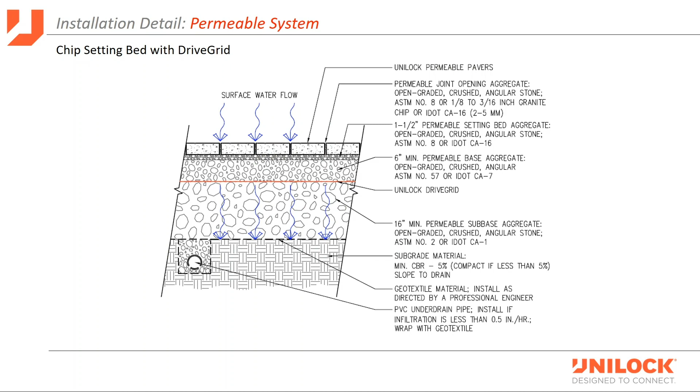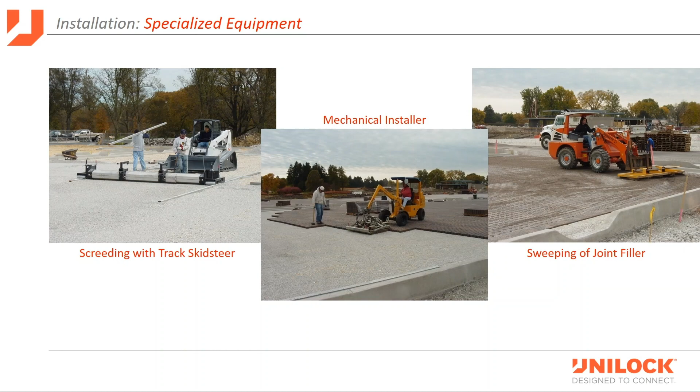So these different machines will help speed up the screeding of the setting bed material, the installation, and also the sweeping of the joint material.

All right, let's take a look at this mechanical installation device. Now this is when they were installing Morton Arboretum in 2004, and this picks up one layer off the bundle, which is about 11 square feet of the Ecoline product, and you can see you're going to set this down right next to the adjacent material.

And with this machine, these are all loose pavers. They're not locked together, so you can see that one flip up on the corner. Then you're going to have someone come over and just kind of snug these up and tap them into place, and he's ready for the next layer.

So in this short clip, if you do the math, it works out to about 8,000 square feet per day based on how fast they can lay these. It's all coordination. They could get up to 10,000 square feet per day per machine, and they can drive on it right away. They just need to come back and sweep in the joint material, but essentially now they could phase in their parking and use it immediately the next day, which is another advantage to using permeable pavement versus other systems.

Now again, I've worked on a lot of projects around Chicagoland. These are just some of the projects I've worked on and how much pavers we have in the area, but you can talk to any of the Unilock reps in your area and I'm sure they can give you a really good list similar to this. So please reach out to them and ask them to assist you on any of your project needs.

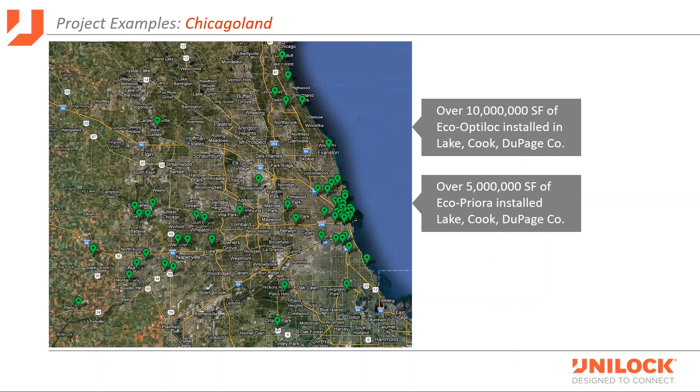All right, part 5, LEED information. Let's talk a little bit about where concrete pavers can help out in your LEED projects. For version 4.1, there's really 4 categories for that. For the building product disclosure and optimization, you really have 2 areas: responsible sourcing of raw materials and material ingredient reporting.

So what that's looking at is where the product's made in relation to all the raw materials and where it's going. So you need to be within 100 miles of your project. For material ingredient reporting, we actually have health product declarations for all our products, HPDs. So make sure you reach out to us on that.

For sustainable sites and rainwater management, the permeable pavement fits into that category perfectly because you can get credit for using permeable pavers on site. And then also for your heat island reduction, for non-roof and roof pavers, so for your parking lot areas, having a lighter material with a higher reflectivity is very important.

So if we drill down on those, like I said, you can find your material ingredient reporting for the product disclosure and optimization. We have all those HPDs listed on our website as well as on Sustainable Minds. So make sure you reach out and grab those when you're working on your projects.

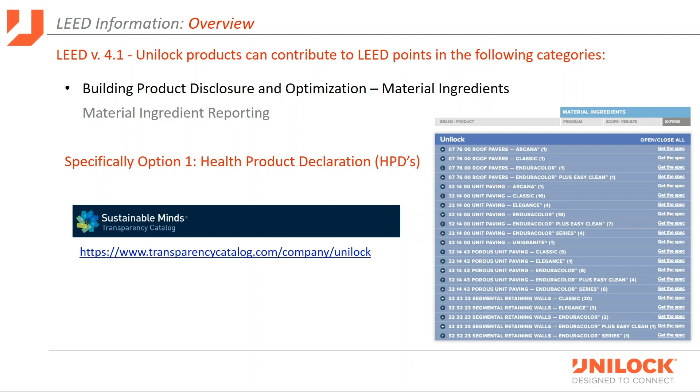And then for the reflectivity, I do like to mention that we've tested over 60 colors. We have 29 that achieve a solar reflectance (SR) of 0.33 or greater, and the 0.33 is the initial requirement. Now after 3 years that drops down to 0.28. It's much harder for us to measure after 3 years, to coordinate all that with 60 materials, so it's just easier to go for the 0.33 or greater.

Now, I want to mention that we do have a full permeable paver detail sheet, and this gives you some typical type details for using permeable pavers, and just kind of a very generic starting point for your projects. We do have all kinds of catalogs, brochures, additional cross sections and details. We do have all our hatch patterns—don't underestimate the use of those, they're very 100% accurate in terms of laying out things, so it can be very helpful. But we also have CAD shapes of all our products, so if you need to zoom in and do a more detailed drawing, we can help you with that as well. We do have 3D SketchUp swatches as well on our website, so if you need to do some early concept designs and want to include that, we have those available. If you go to our architectural site on our website and go to resources, you can find that. We also have a bunch of project profiles that can help you see similar type projects.